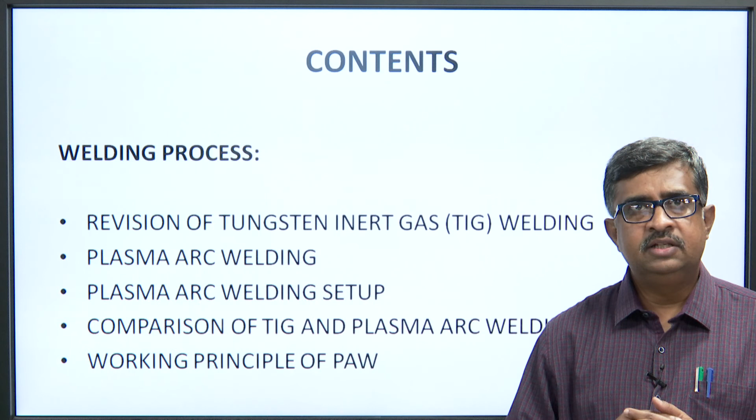So I will again start with TIG welding. These are the topics we are going to cover today: revision of tungsten inert gas welding, plasma arc welding, plasma arc welding setup, comparison of TIG and plasma arc welding, and working principle of plasma arc welding.

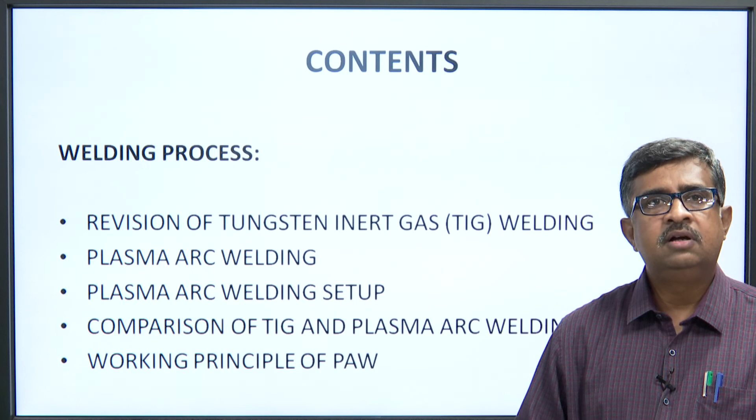Mainly the focus will be on plasma arc welding. Some topics of tungsten inert gas welding will be revisited.

So tungsten inert gas welding is an arc welding. Remember, there is nothing great in that, but what is great is that you can work with thinner materials. This technique was developed in the 1940s, as I mentioned in an earlier lecture.

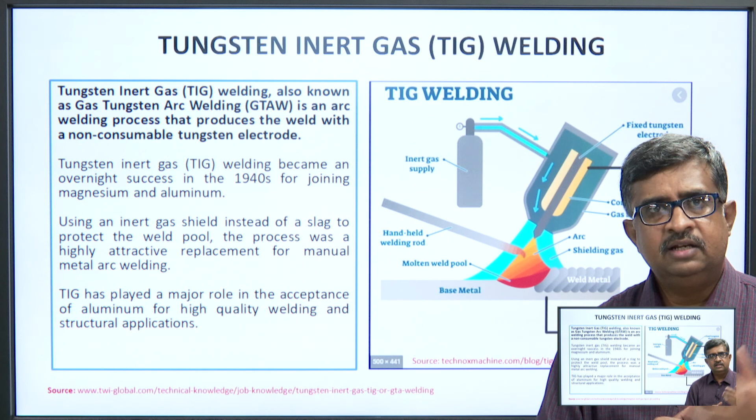So TIG welding has a very high role in welding thinner materials. The shielding gas used is an inert gas, which allows us to weld thinner materials, and with the help of non-consumable tungsten electrodes, materials like magnesium and aluminum can also be joined. That is the advantage of tungsten inert gas welding.

So the principle of tungsten inert gas welding: in the TIG welding process, the arc is formed between the pointed tungsten electrode and the workpiece, in an inert atmosphere of argon and/or helium. As shown in my last slide, inert shielding is there.

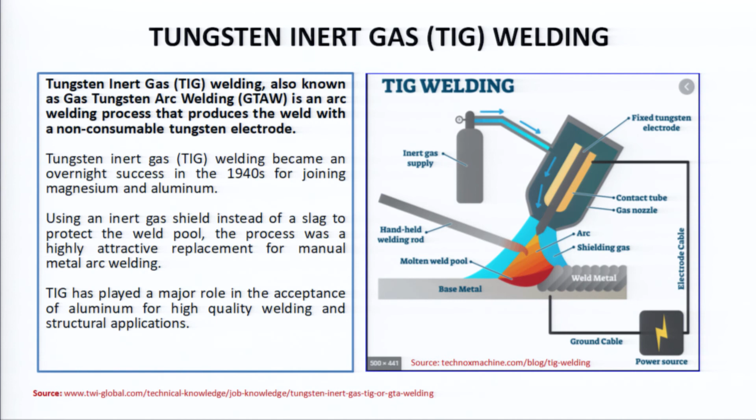If you can see here, I have shown the shielding, this is argon or helium gas. The small intense arc provided by the pointed electrode is ideal for high quality and precision welding. Because the electrode is not consumed during welding, the TIG welder does not have to balance the heat input from the arc as the metal is deposited from the melting electrode.

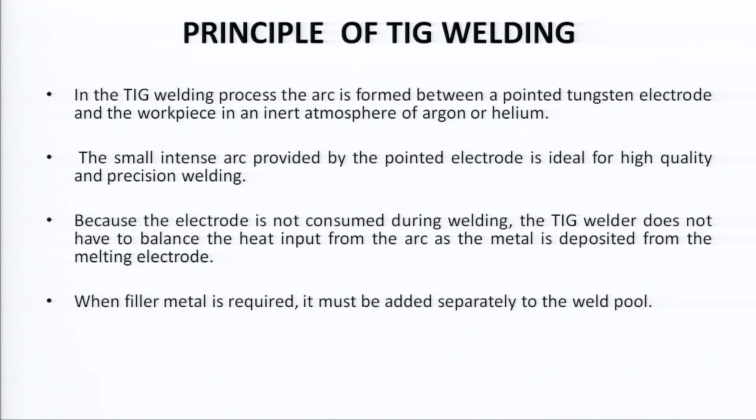When the filler material is required, it must be added separately to the weld pool.

These are the factors and parameters for successful TIG welding. Arc starting is very important. The welding arc can be started by scratching the surface, forming a short circuit, and it is only when the short circuit is broken that the main welding current will flow. This risk can be minimized, but there is a chance the electrode may stick to the surface. So the welder must remember to control the electrode so that it does not stick to the base metal being welded.

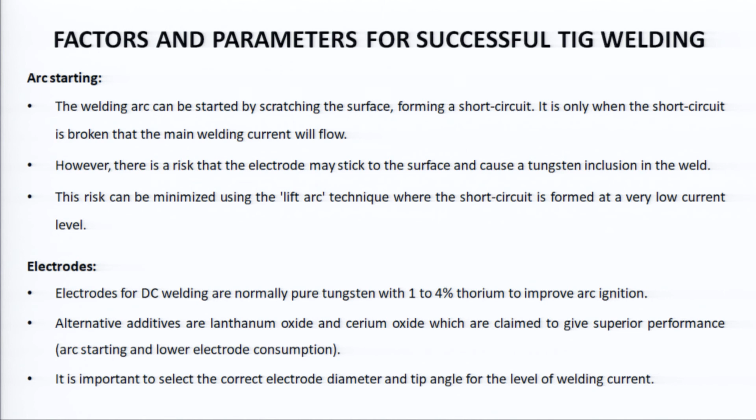Electrodes for DC welding are normally pure tungsten with 1 to 4 percent thorium to improve arc ignition. These things help in achieving successful TIG welding.

Shielding gas is selected according to the material being welded. The following guidelines may help. First is argon gas, the most commonly used shielding gas, which can be used for welding a wide range of materials including steel, stainless steel, aluminum and titanium. So argon is the shielding gas.

Remember, shielding is very important to control oxidation. When working on thinner material like stainless steel, such as the utensils you've all seen at home, shielding gas plays a very important role. If something goes wrong and the material reacts with the atmosphere, that portion will be spoiled and you will not be able to weld it properly.

Argon plus 2 to 5% hydrogen: the addition of hydrogen to the argon makes the gas slightly reducing, assisting in producing cleaner looking welds without surface oxidation. As the arc is hotter and more constricted, it permits higher welding speeds. Disadvantages include the risk of hydrogen cracking in carbon steel and weld metal porosity in aluminum alloy.

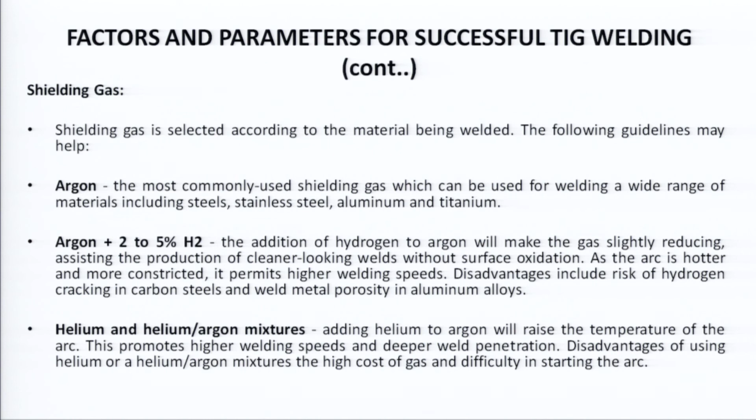Application of TIG welding - as I said at the beginning of today's lecture, students must understand the working principle. Fine, you understand there is a tungsten electrode and shielding gases like helium, and a welding arc is generated, and you do the welding. Nothing great in that, and I am repeating the same thing for any type of welding we study, but students, you have to understand where it is used and why, and what its application is.

Now if you ask anybody in the aerospace industry, he will say they want to cut the weight by 10%, they want to cut the weight by 20%. So you need to work on thinner material, which has its own mechanical property requirements as per strength and toughness, ductility, malleability and so on. But when it comes to the welding part, whatever strength they give the material, ultimately when you want to join these pieces, some of them have to be joined through the welding process. So for thinner material, this type of welding has a very important role.

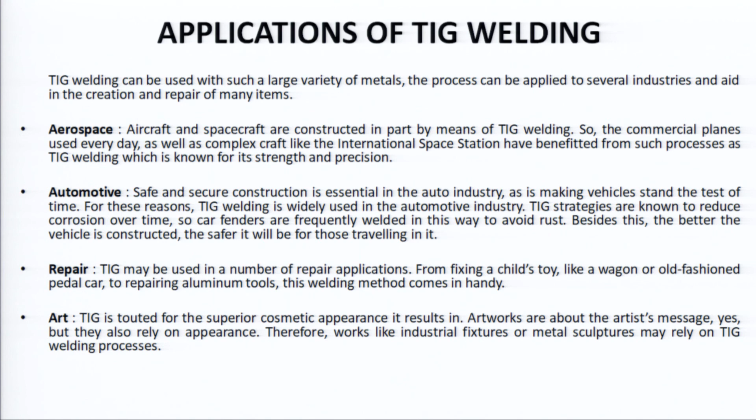So applications are to be understood on the basis of whatever you have studied, that theory is applicable here. Students, if you can relate this theory, you will find that, as I said in the beginning, a doctor gives a particular medicine for a particular problem. Similarly, as a welding engineer, you should understand that for a particular application there is a particular type of advanced welding technique, and if you can relate that, you can apply it anywhere in the same category.

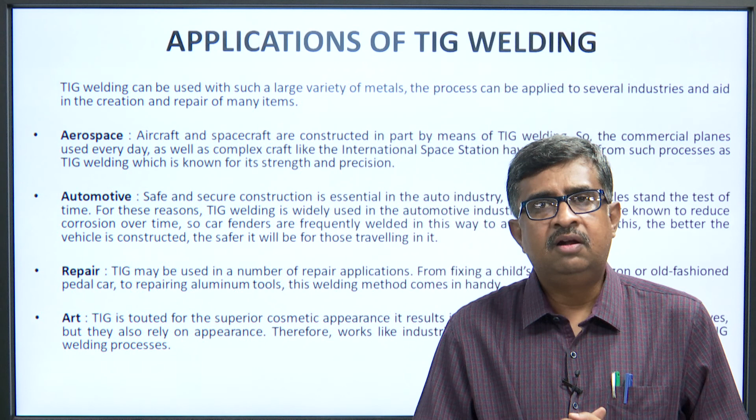Advantages and disadvantages of everything are there. So here also there are certain advantages, and some disadvantages too. It is suitable for thin materials, as I already told. Clear visibility of the arc provides the operator greater control over the weld. Strong and high quality joints are obtained, no flux is used, hence no slag formation, which results in clean welding.

When you come to TIG welding, it is the most difficult process compared to all other welding processes. The welder must maintain a short arc length - arc length is very important. If you remember, in lecture number 3 or 4, this arc length was explained by me. So if you increase or decrease the arc, there is a direct effect on the weld beads, the weld beadings which are made.

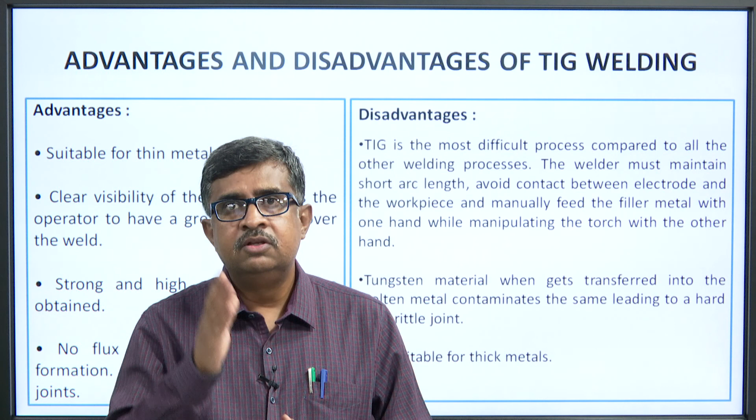So the welder must maintain short arc length, avoid contact between the electrode and the workpiece, and manually feed the filler material with one hand while manipulating the torch with the other hand - this is difficult. When you hold the torch and hold the filler rod with the other hand, it is difficult to manage.

Technicians must be given thorough training and practice, only then is this type of welding easy for them to do. Tungsten material, when transferred into the molten metal, contaminates it, leading to a hard and brittle joint. A hard and brittle joint is difficult to clean, and nobody wants that hardness and brittleness in the welding.

But from this welding, the disadvantage is that it might become brittle and hard, and it is not suitable for thick metals, because you cannot penetrate too deep.

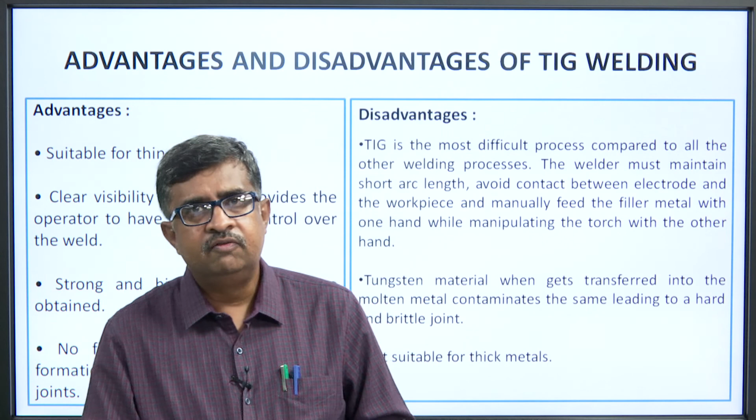It is only suitable up to a certain limit; thin materials can be welded. So students, these are the advantages and disadvantages of this welding. In the last lecture this part was slightly mentioned, but here I have explained more for your betterment and learning.

Now we will take another type of welding, plasma arc welding. When I say plasma arc welding, there are 2-3 words which are new to you. Arc welding you know, but what is plasma in that? Nowadays COVID-19 treatment is going through plasma, you must have heard. So here also, mechanical engineers have used this plasma arc welding from a very long time. So I will let you know, for our mechanical engineering purpose, what is plasma.

First of all we will understand what is plasma arc welding, and why we need this plasma arc welding. Go to the disadvantage of TIG welding - the limitation was that only thin materials can be welded. But here you have the advantage of welding thicker materials. You can utilize this welding for thicker material, fine.

So plasma arc welding is a liquid state welding process in which the metal to metal joint forms in a molten state with the help of hot ionized gases known as plasma. These hot ionized gases are used to heat the work plates, and the joint is created due to fusion. Here the plasma is playing a role.

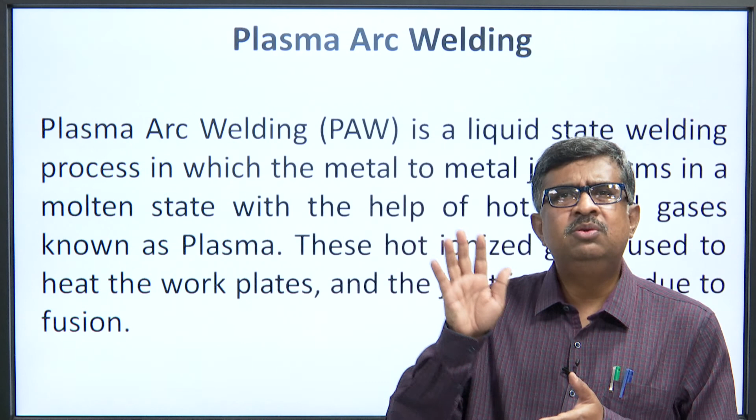Now I will explain what is plasma. Arc welding you know, the process remains the same, but how are we utilizing this plasma? So ions and electrons in the space are usually closely mixed in a soup containing an equal amount of positive and negative charges. Such a mixture is known as plasma.

So there are two types of plasma: primary plasma and secondary plasma. The primary plasma mode employs an energy source to ionize and dissociate a source gas, creating a gas plasma consisting of physically and chemically active components. Secondary plasma provides two additional plasma modes: downstream secondary plasma and ion free plasma. That is called secondary plasma.

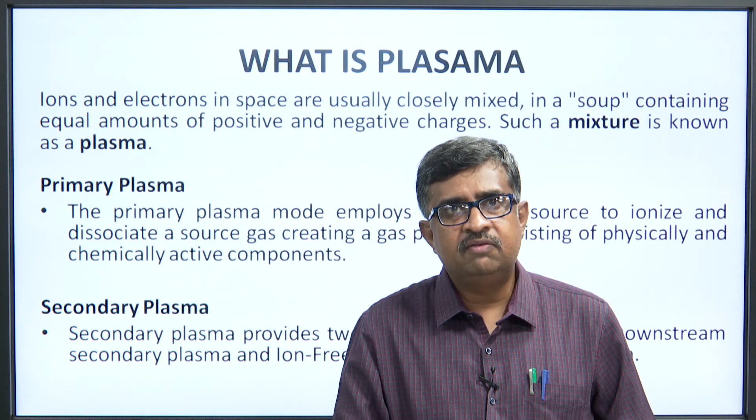So it is an equal mixture of positive and negative charges. Such a mixture is known as plasma, and here we are going to use it. It is important for us as a welder. So I will show you the diagram.

Plasma arc welding setup consists of a power supply. I have shown the cut section. Students, I request you, when you understand these things, you can go on the websites. Today in my lecture I have given reference website links. You can go and see there also, video is there and a lot of good diagrams are there, and it will help you understand. Power supply is one part of the setup - plasma welding torch, water recirculator...

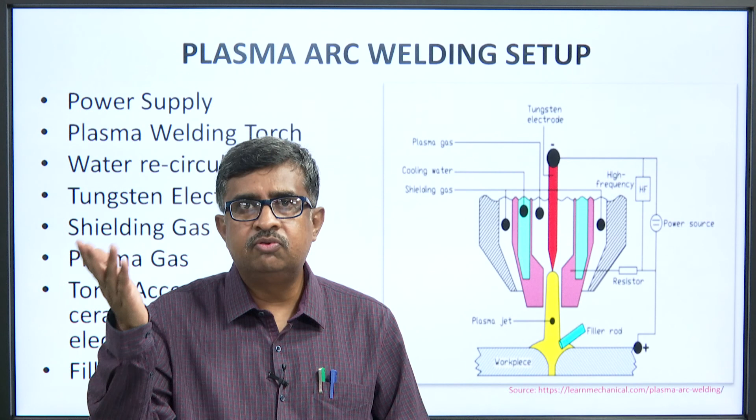...tungsten electrode, shielding gas, plasma gas, torch accessory. The torch consists of a lot of accessories. Accessories are utilized to improve the productivity of that part, and filler material, fine.

So if you see this, this is the tungsten electrode, the red which I have shown. Plasma gas, you can see it comes from this place, and as a result of the tungsten electrode and plasma, the gases convert into plasma. Cooling water is there, this is the collet. So cooling water is there to make it cool.

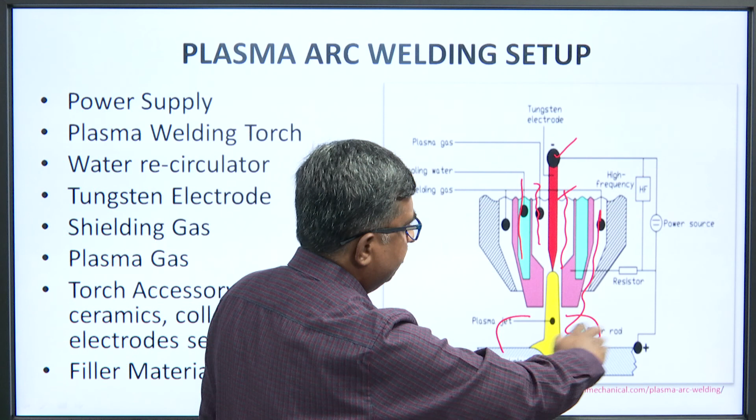Shielding gas is there, which protects the weld zone, and again you can see this circuit - high frequency circuit is there, and it is connected positive, the base material is connected to positive, and the electrode is connected to negative, fine. So if the diagram is clear, I can go on to the next slide.

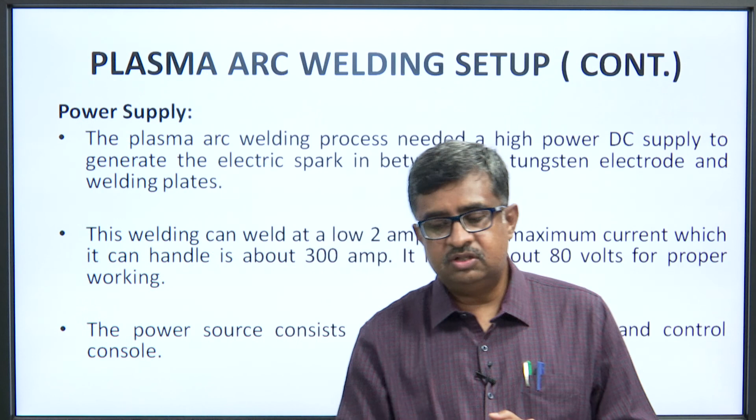So the plasma arc welding process needs a high DC supply to generate the electric spark between the tungsten electrode and the welding plates. This welding can weld at a low 2 ampere, and the maximum current it can handle is about 300 ampere. So a wide range is there. It needs about 80 volts for proper working. The power source consists of transformer, rectifier and control consoles.

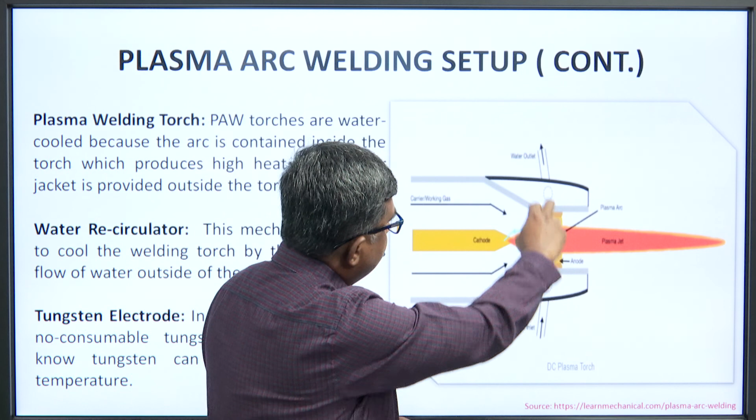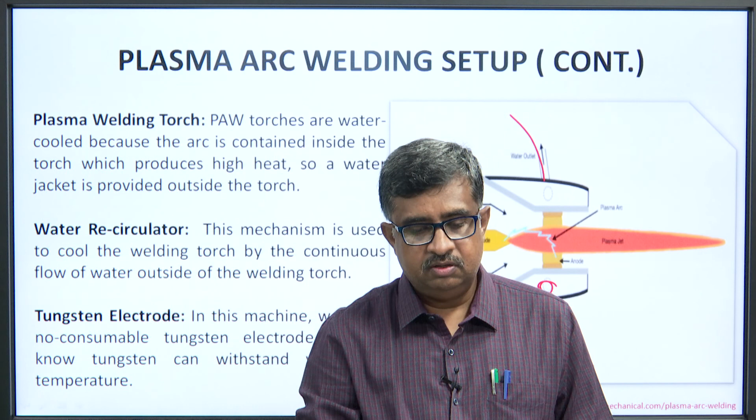This is the plasma torch. You can see the working gas is common. This is the electrode, and as a result plasma is connected, plasma jet in the form of an arc is coming, and here water goes in through this and water comes out to make it cool. You can see the slide: plasma welding torch, water recirculating, and tungsten electrode. We will go to the next.

Plasma arc welding setup. Here also shielding gas is required, plasma gas is required, and filler material is required. In the welding process we use two inert gases. We need to maintain a low pressure to avoid turbulence. While welding, due to the low pressure gas, a welding shield is formed, and on a weekly basis it needs to be changed.

Plasma gas is an ionized gas composed of nearly the same number of electrons and ions, which I already told you. Plasma gas consists of an equal number of negative electrons and positive ions.

Filler material is used in plasma welding - actually, there is no filler material. If filler material is used, then it is directly fed into the weld zone, from the hand, to take care of things.

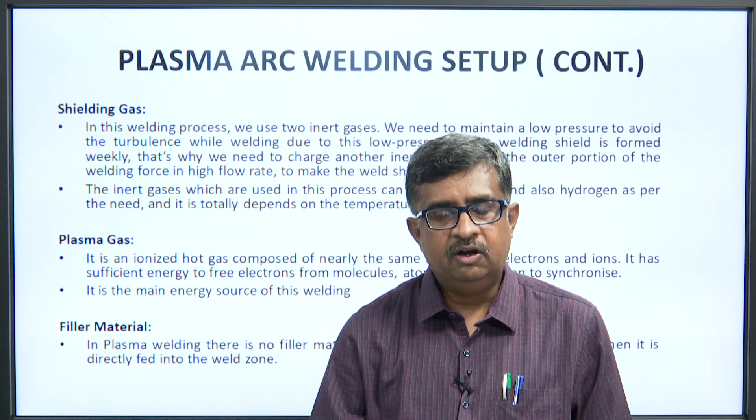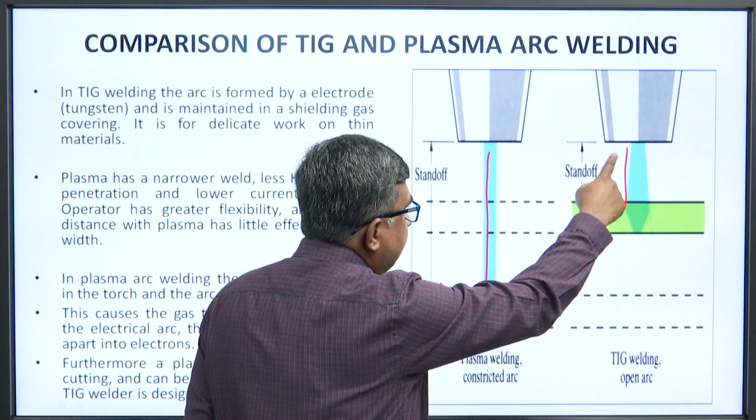Comparison of TIG welding with plasma welding. You can see the diagram here: the arc length, the arc length you can see, the standoff. So, this is the difference.

In TIG welding, the arc is formed by the electrode and maintained in a shielding gas covering. It is delicate work on thin material. Plasma arc welding has a narrower weld, less HAZ, deeper penetration and low current demand. The operator has greater flexibility as standoff distance with plasma has little effect on the bead.

In plasma arc welding, the electrode is placed in the torch and the arc is infused with the gas. This causes the gas to ionize and conduct the electric arc. This causes atoms to break apart into electrons.

Furthermore, a plasma arc is mostly for cutting and can also be utilized for welding, while a TIG welder is designed for welding. So the major difference, as you can see, is the arc is more and deeper, and it can be used for cutting in case of plasma arc welding, whereas TIG is used only for welding. This is the major difference.

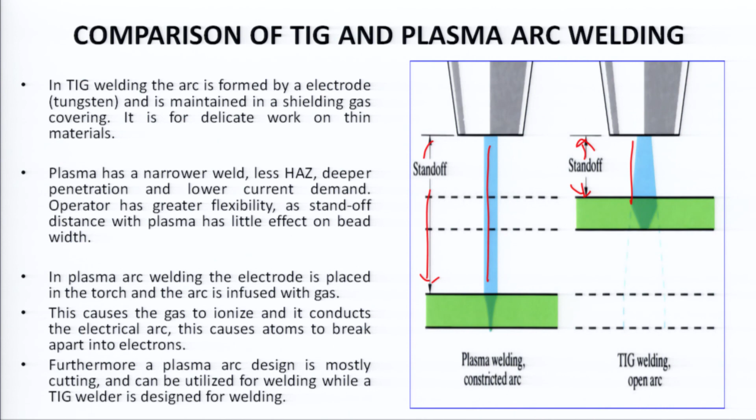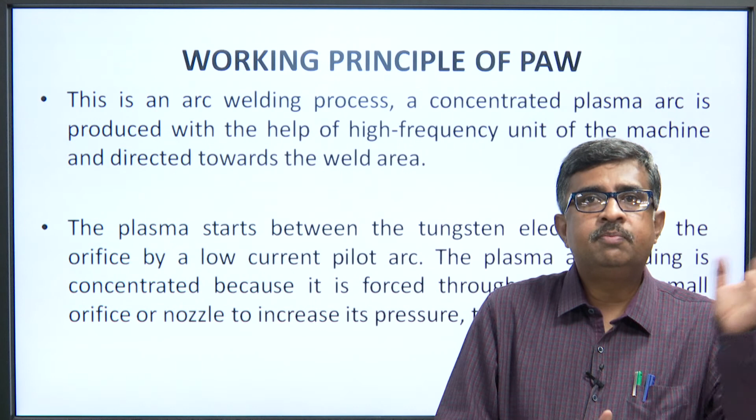Because of the above characteristics, the arc becomes very stable, the shape improves, and the heat transfer rate also increases. The temperature of the arc is as high as 33,000 degrees Celsius.

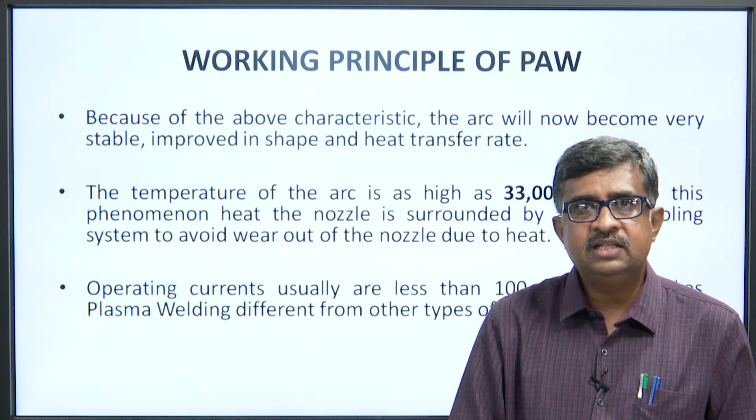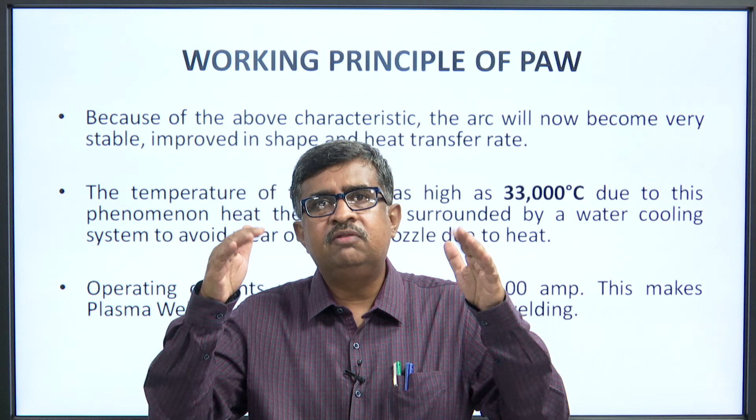Due to this phenomenon, the nozzle is surrounded by water cooling. As the temperature is very high, you have seen that at the nozzle, water was coming in and going out, cooling the nozzle since the temperature is very high. To avoid wear out of the nozzle due to heat, operating current is usually less than 100 amperes.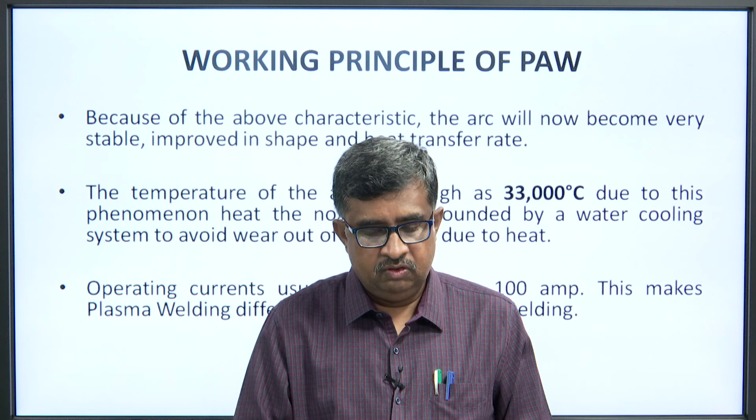Again, I will say that you have to understand that TIG has some special purpose and plasma arc welding has some specific purpose. TIG is used for thinner materials, whereas plasma arc welding is used for thicker material. TIG welding is used for welding, and plasma arc welding is also used for welding, but it is also used for cutting purposes.

So students, if you have understood these things, you will understand that every advanced welding technique, whether it is plasma arc welding or TIG welding, has a specific purpose.